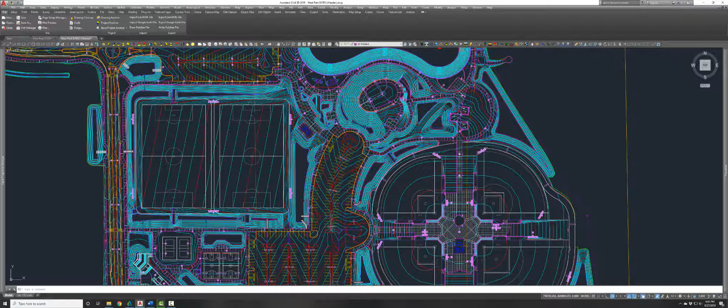Now that we have our surface open, we're contoured at a quarter of a foot again, and there's differences. You can see parking areas cleared up here. These roundabouts are a lot cleaner and warp into the parking area better.

Let's look back up here to the north where this one was giving us issues with the original file. We've now got that sorted. We had to do a lot of constraining, and I'll talk about that in a minute, to get some of these things to work out.

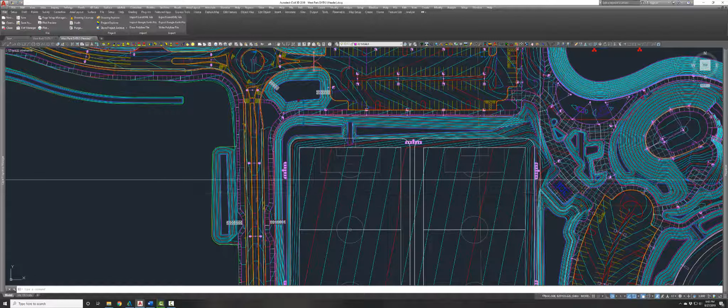This weir here was okay, but it tried to work itself into this odd area here, so we literally had to bend this and try to make it work so they can get it well in the field. Again, we've got this median cleaned up here. There's not any issues any longer there. So all in all, the thing is good.

But you have to remember we started out back from the beginning because we see those landmines and we don't know where they are. The easiest way, instead of dissecting the surface and putting it back together, is to just build it clean.

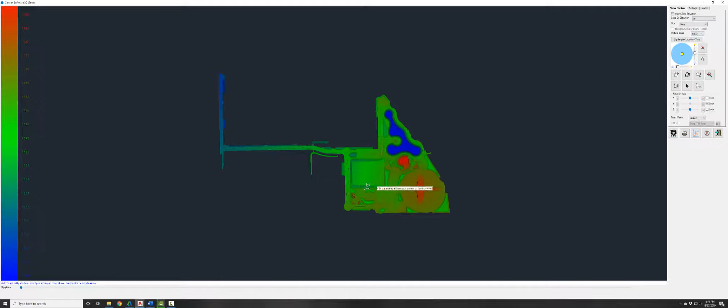Now I want to take a look at the surface and talk about some things. Let's crack this thing open and get the most recent version. I'm going to run this at 3 times vertical scale and come in and we can look over here at the cul-de-sac. We're cleaned up. We've got this entry back in good shape now, so that's okay.

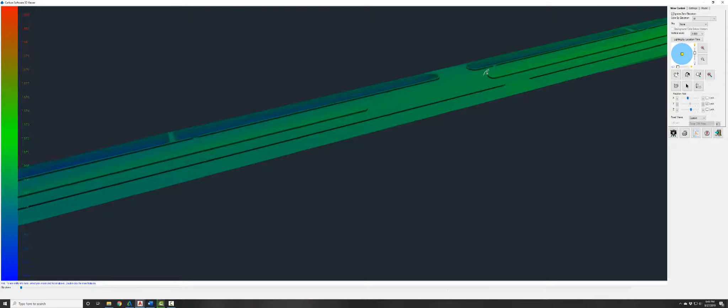You can see it here. A lot of little details are put in, curb cutouts, weirs, things that you didn't see in the engineer's file because they didn't need it. This customer wanted it. Does everybody? No. Do we do it all the time? No.

Here's what I want to start talking about. These are details that make the difference. Take a look over here. This is a skate park section of this project. As you can see, we have now put in all these features that they're going to add for the skate park that are part of this project that weren't there before.

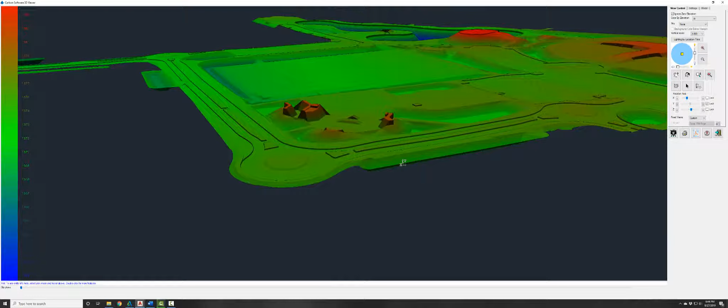So all these things are going to be able to be built by the crews on the ground. We integrated this with the information from the people that did the park design. So there's a lot of detail in here that you just don't see.

If you remember, there were some issues with the parking area here, with these peninsulas and this area here. Obviously that's all done, the parking lot is a lot smoother now. And again, little details -- these are little weirs and inlets here that are coming through this section.

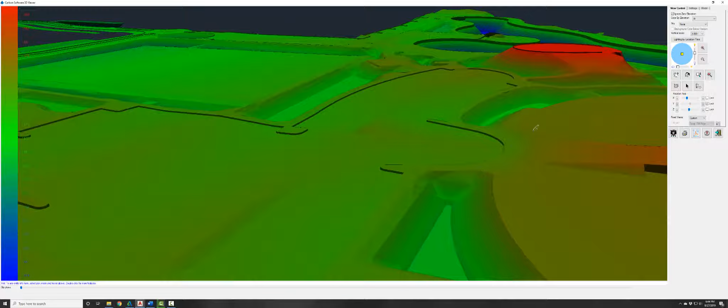But I want you to take a look over here. The stairway is set for grading here. And then we've got a section here that is meant to be some walls, and the contractor wanted those walls so they could grade and install walls.

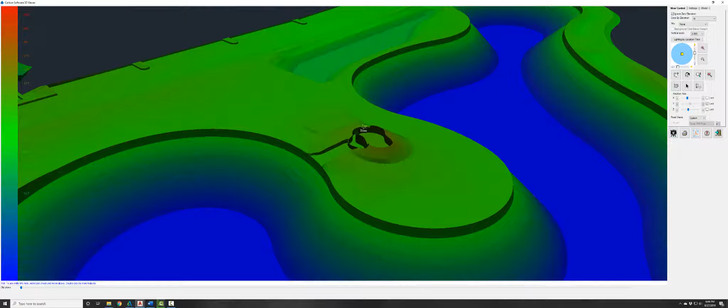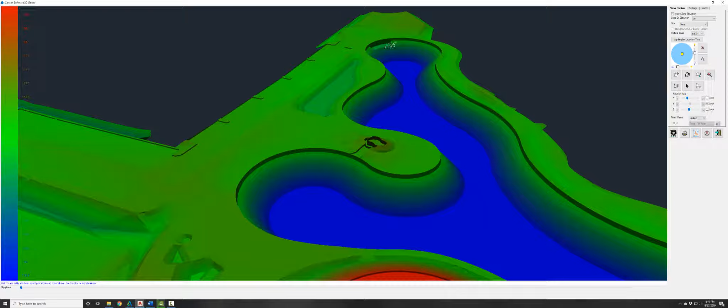So these walls were added, and you're not going to see that in the engineer's file -- it's something that we added and were able to put in, so they've got a better chance to build this thing and make it look better. So these walls are in here now. We did details on the retention area where they can come in and hog out so they can get the drainage structures in.

Another thing I want to talk about is that I showed you the triangles on the other one. Let's take a look at the triangles on this one. If I can find them, here we go. Again, let me shut off the contours, it'll just make it a little bit easier.

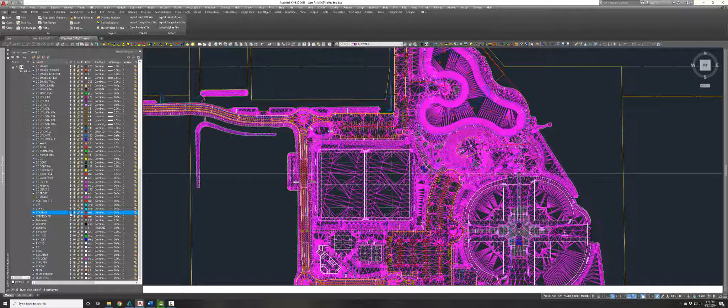There we go. Again, I like consistent size triangles. We don't have too many, we don't have too few. Can you do it all the time? No, but that's what we strive for. You want to reduce the one-to-many relationships as much as possible.

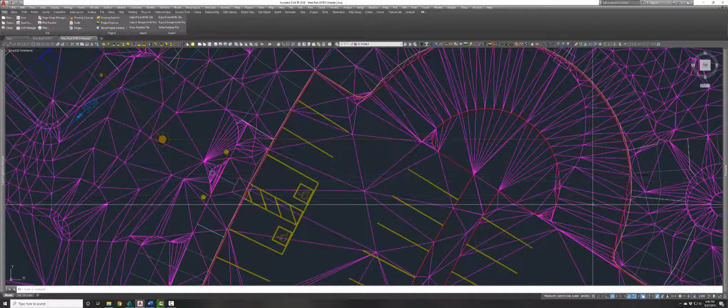Look at the section here. Now, I'm not really concerned about inside the island here because that's a grading area. But take a look here at this arc. We came in and made sure that these triangles were consistent size. Look through the parking area. When you hit a radius area, we take and bring some break lines into that.

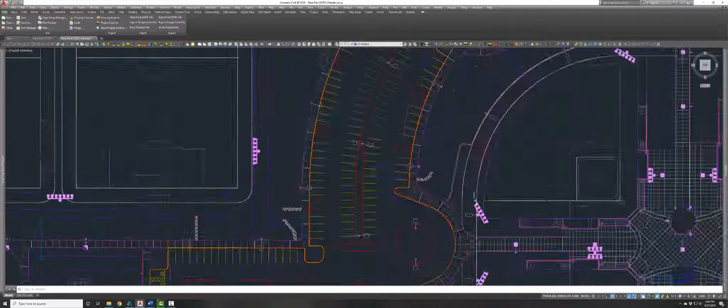But here's the big difference, and here's what happens when you put together a job like this and build those bits and pieces. I want to show you, and I made them purple so you could see them. I want to show you the difference, and that's all here.

This is the layer of grade breaks that were drawn by the engineer that built this one. Chad Lawson did a great job on this thing, but take a look at all these crazy oddball grade breaks that had to go in.

I'm going to zoom in into this area to show you what had to happen here. Let's bring everything back in. So these are areas where there's going to be playground equipment where they needed specific grading done.

And guess what? We're able to build that, integrate it in, not only clean up the big things that we saw that might get missed on a cursory review, but we came back in and got those details so when it comes time to put that playground equipment in, the subgrade's correct, they've got footings where they need them, they've got piers drilled where they want, and all this makes a job go quicker and easier.

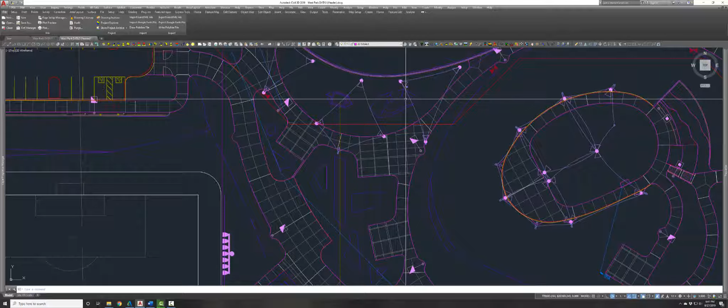And that's why you probably end up building these things by hand more often than using a file given to you by the design engineers.